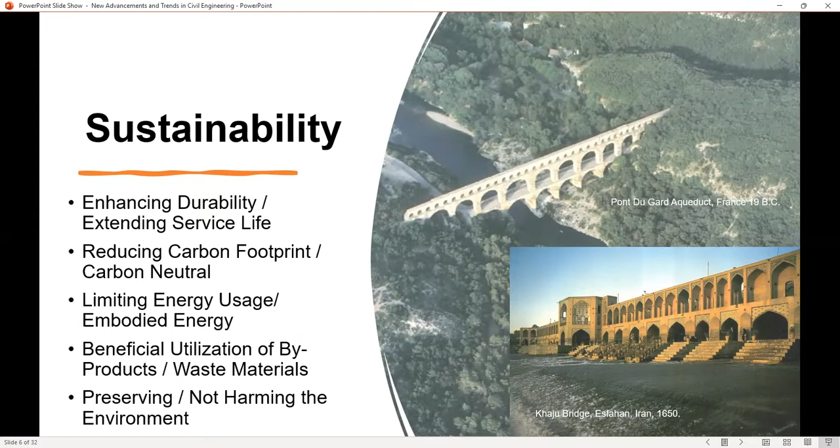We want to beneficially use byproducts, waste materials from industrial processes, in construction. So not only to use a waste material, but also to improve the properties of construction material. And finally, we want to preserve and not harm the environment.

Now, concrete is the most used construction material in the world. And of course, a major ingredient of concrete is Portland cement, and it's produced all over the world. Portland cement is a significant contributor to CO2 emissions worldwide, approximately 0.9 kilogram of CO2 for every kilogram of cement produced. That's roughly about 8 to 10% of global CO2 emissions. It has a lot of embodied energy because a lot of energy goes into producing Portland cement, the clinker, the high heat that has to be applied, and that builds significant energy into the material.

Now, what can we do about it? We have to work with concrete. It's a major construction material, but we can try to reduce its impact on the environment by using materials that mimic, that act like cement, but they are not cement. And ideally they could be waste materials that we can use in there. And those we call pozzolanic materials, and I'll explain why the word pozzolanic. Those can not only reduce the Portland cement usage in concrete, but also can improve the properties of concrete and make it more durable.

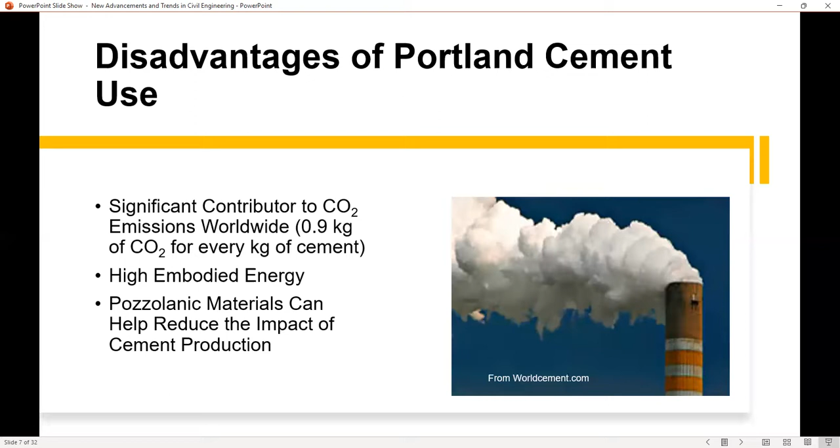Pozzolanic materials, by the way, pozzolanic comes from the old Roman word pozzolana, which was a volcanic ash. And pozzolanic material is a material, typically very fine powders, that become cementitious in the presence of lime. Okay, so it can be used to replace part of Portland cement in concrete. 10%, 15%, 20%, 25% can be reduced with that.

So what are some of the major pozzolanic materials? For example, fly ash: in coal burning power plants, in the stacks, they put devices to catch the fly ash from getting out into the atmosphere. And in the United States, for example, about 100 million tons of ash gets produced. For many years, they would be landfilled, but then research showed that they could be used in concrete and replace the cement in concrete. This pozzolan, because Portland cement has lime in it, would react with that and acts as a cement and reduces the impact of cement, but also improves durability properties of concrete.

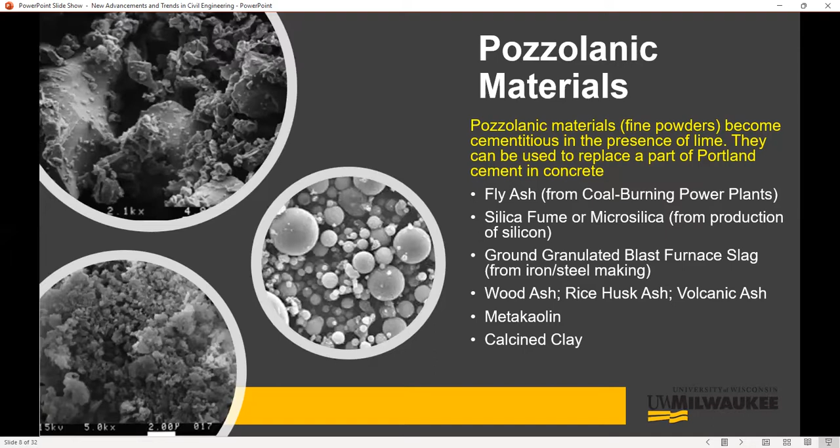Ground granulated blast furnace slag is also made from a waste from iron and steel making industries. Also around the world, wood ash, for example, rice husk ash, volcanic ash, these all can become cementitious in the presence of lime. Other materials, metakaolin, calcined clay. We are working at the University of Wisconsin, Milwaukee on developing new pozzolans based on industrial waste materials that can be beneficial to the reduction of cement use.

In terms of durability, we know structures that have withstood the test of time, centuries in service. The stone arch bridges throughout Asia and the Roman Empire are indicative of that ability to make durable structures. Now, the Roman arches were typically semicircular arches, but we'll see with the Great Stone Arch Bridge, they became more flattened over time to become more efficient. However, how can we make concrete more durable? There are ways that we can make concrete more durable, extend service life. One is to use what we call high performance concrete, which essentially reduces permeability.

A major way that concrete is harmed in the long term is when water mixed in with harmful chemicals like chlorides or sulfates, for example, get into the concrete, and if there are embedded steel reinforcing bars, causes corrosion of the steel, and when the corrosion happens, the steel wants to expand. As it expands, it pushes the concrete away, cracks it, and leads to spalling.

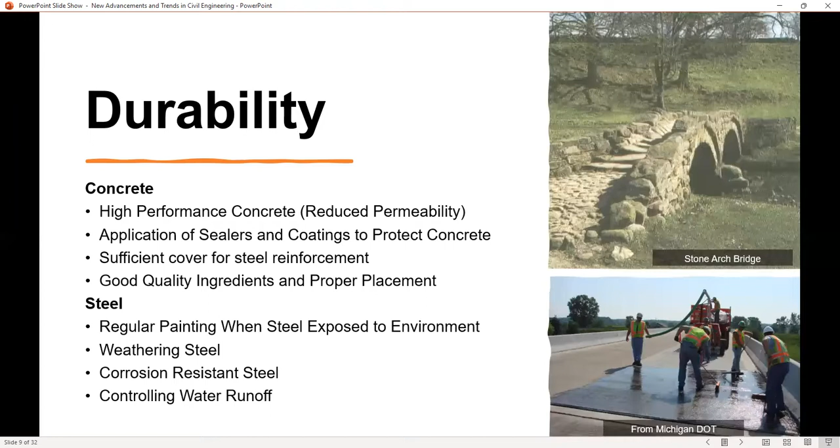Now, we look at recycled materials or waste materials in two ways in concrete. One, concrete itself can be reused when it's at the end of its service life. When we have concrete pavements, it is very common in the United States to break it into aggregates and use it as sub-base material. Okay, so you are reusing the material into another roadway. Now, there is research going on to use that in concrete as well. That's a little bit more challenging, but it has been successful in some research projects that have been done.

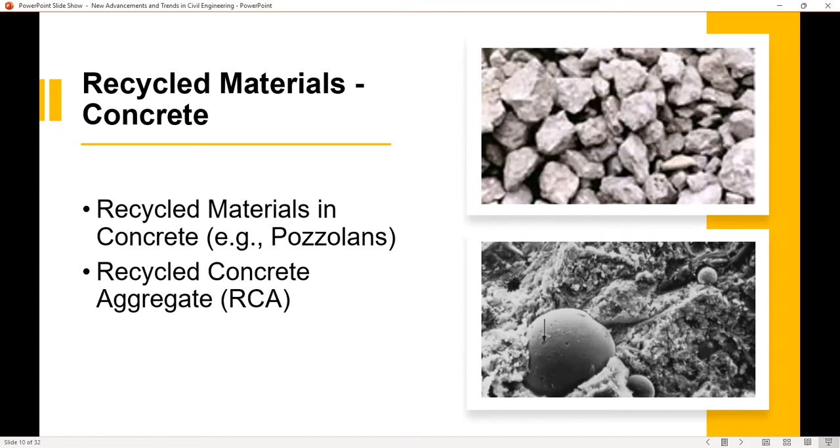Another way is to put waste materials, which are pozzolans, for example, into concrete. The bottom picture here is a scanning electron microscope image. You see the fly ash inside the concrete. That fly ash, as a pozzolan, helps a lot with the durability of concrete.

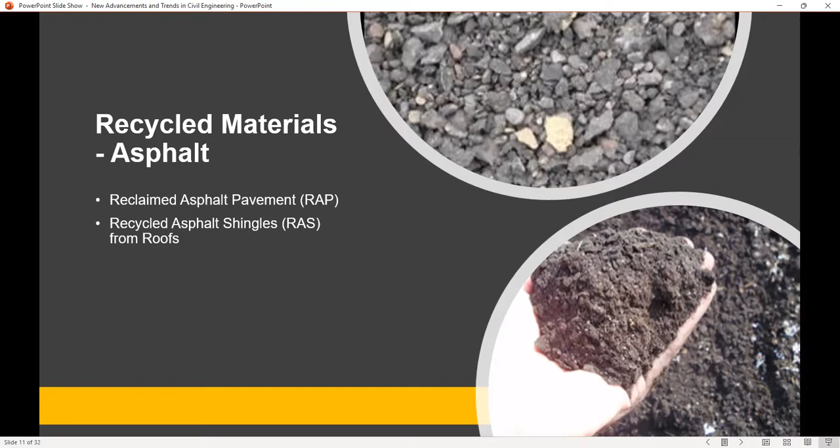Now we recycle pretty much everywhere. If there is asphalt pavement, when they want to remove it, they recycle the material. The bitumen and the aggregates, they're all recycled. In the US, a lot of houses have asphalt shingles. Those asphalt shingles are also recycled.

Now, I'm going to talk a little bit about resilience. That's another important topic in civil engineering. We define resilience as the ability to sustain and resist the forces of nature, forces of nature being earthquakes, floods, winds, and recover from them without loss of life. That's the first and foremost thing, no loss of life. So even in the most severe earthquake, we want to preserve life. Our structures should not collapse, okay?

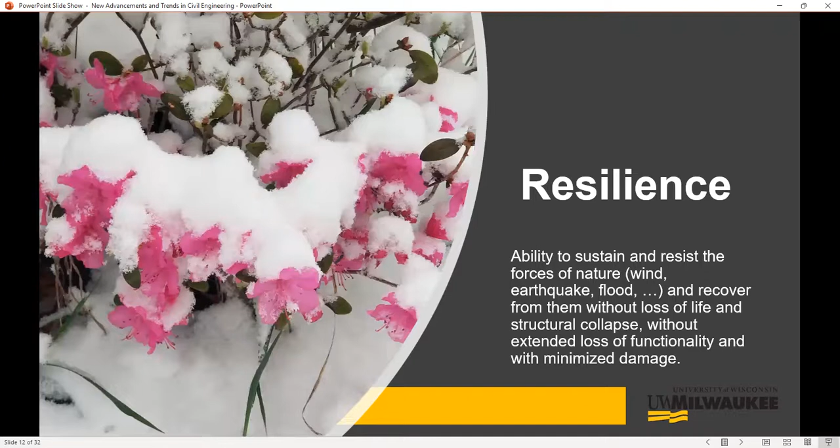However, we expect some level of damage because to make it without damage is going to be very costly. But more and more people want to be able to have usable buildings right after a major earthquake. So that makes our job more difficult, to not only preserve life, but also preserve the structure as well, okay? So resilience is, after you're hit, to stand up and continue again. That ability is very important in a structural system.

Now, a lot of times we do that by making the structure redundant. That means we don't rely on the structure to have one load path to the foundation. We want multiple load paths. So if one gets damaged and severed, the others keep the load transferred to the foundation. You don't want cases where failure of one element causes the failure of the entire structure. We can't allow that.

Okay, so more and more, let's say in Los Angeles, if a major earthquake happens, people have been saved, but more and more we want to reduce damage. We want, for example, the hospitals to be operating fully. They cannot be shut down. So we design those to a different standard. It's going to cost more, but emergency vehicles, emergency centers, hospitals, police forces have to be able to operate in the worst condition. So they have to be designed for a different level of performance after an earthquake.

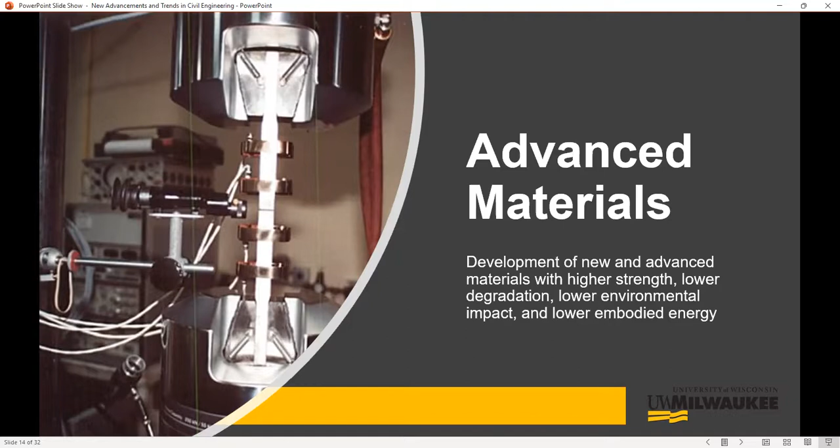So we're looking at advanced concrete materials, advanced steel materials, and fiber-reinforced polymer composites that are finding more and more uses in civil engineering. Advanced wood or timber materials, that's a new development recently, with a lot of activity. Advanced asphalt materials, self-healing materials, shape memory alloys. Shape memory alloys are materials that, if you deform them and apply temperature, return to their original shape, and that property can be used for many purposes. I'm going to touch on some of those in the next slides, not all of them.

One of the most active research areas in concrete in the United States is ultra high performance concrete. This is very high strength concrete that I'm going to talk a little bit more about later. We also have older fiber reinforced concrete that has properties that improve concrete. However, in a typical fiber reinforced concrete, the fibers cannot replace the structural concrete. They cannot replace the steel reinforcement.

We have a Professor Sobolev at our university who is a world expert on super hydrophobic concrete, using nanomaterials. As I said, durability comes in when water penetrates into concrete. By making water move away, you improve the durability of concrete, and that's super hydrophobic concrete.

There are works being done on self-healing concrete. So if a crack develops, automatically it can work to fill that crack back up. There are different ways of doing that, and research is being done on that.

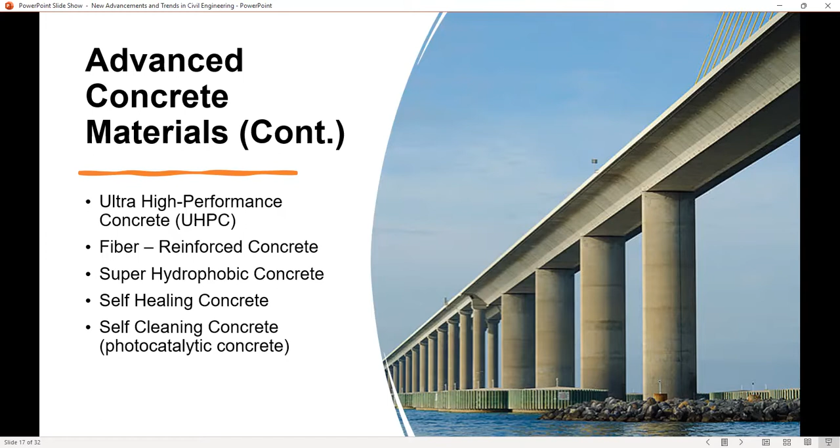Also, there is self-cleaning concrete, especially for important architectural features. You don't want the dirt to cling to the concrete surface. So by adding, for example, titanium dioxide, you can make photocatalytic concrete. It's easier for the dirt to wash out and not dirty up the surface of the concrete.

Now let's talk a little bit about ultra high performance concrete. There are different definitions for it, but the Federal Highway Administration in the US defines UHPC as concrete at least 150 MPa in compressive strength. Now, it also has to have high tensile strength, but when you get to the tensile strength, we don't want the strength to drop to zero. We want it to sustain itself.

So after cracking, it should still hold a 5 MPa tensile capacity. That will give it a more ductile behavior for concrete. Normal concrete, when it gets to a cracking load, suddenly drops to zero, and that's a very brittle nature. So this will address that. Of course, you will use steel reinforcement in UHPC as well to provide additional strength.

Now, typically with UHPC, the water to cement ratio is less than 0.25. If you have worked with concrete, you usually work with higher numbers. So this makes it very difficult to work with. That's why you have to use chemicals, specifically superplasticizers, to make it flowable so you can place it correctly.

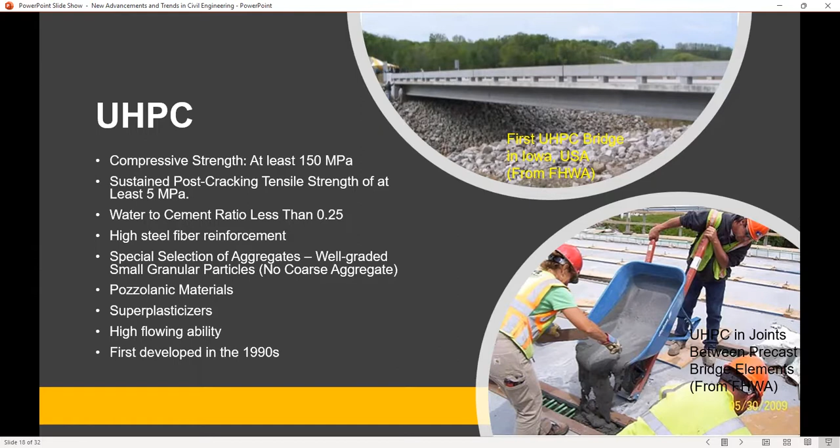In terms of reinforcing bars, up until a few years ago, the most common one in the United States was a 60 ksi or 414 MPa reinforcing bar. That's yield strength of the bar. Now they're commercially available to get 550 or almost 700 MPa bars for use in concrete. You also have stainless steel bars for corrosion resistance, but those are expensive.

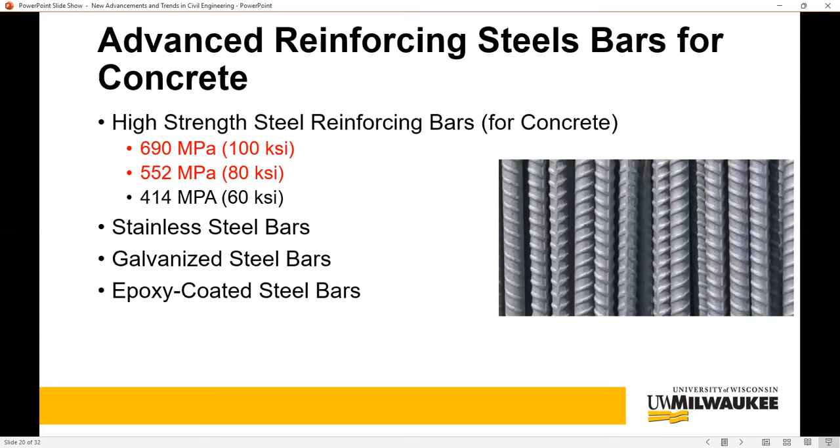There's galvanized bars, which are not as effective as stainless steel, and they have issues with the alkali environment in concrete. Epoxy coated steel bars have been used a lot. They do help. However, if the quality is not good, if there are small what we call holidays, or small holes in the epoxy, the corrosion that you could get is far worse than if you hadn't put the epoxy on it. It's a very important lesson that first applications of epoxy coated bars in the United States had major problems, and that was mitigated later.

There are also fiber reinforced polymer, or FRP, composites that are used. These are typically continuous fibers, either glass fiber, carbon fiber, aramid fiber, or basalt fiber, and there are others, mixed in with a polymer, an epoxy, and you can make bars with it. You can make sheets with it. There are two problems with that. One is a polymer is not fire resistant. So for indoor use in structures, there is a danger of fire and damage to that material unless you protect it.

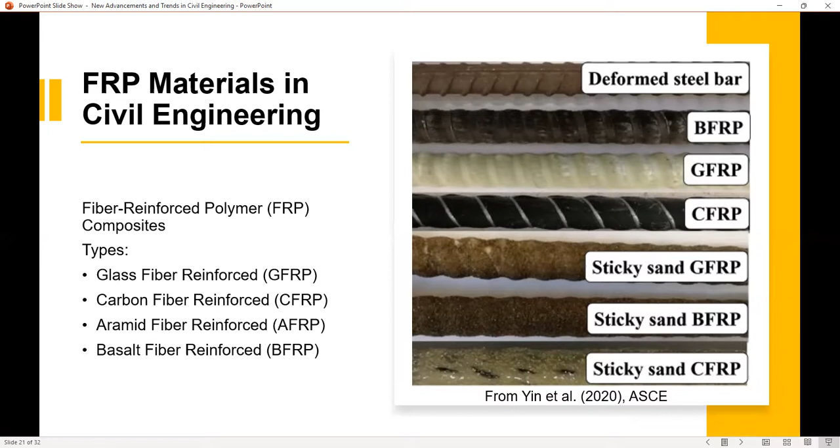But the second, more important issue is that in steel, you have a very well-defined yield, which prevents brittle fracture and premature failure. But in FRP bars, the stress-strain curve is straight all the way to failure. So when it reaches failure, there is a sudden brittle fracture of the material. However, it has its uses. For example, if you have an MRI unit in a hospital and you don't want the walls to have steel in them because you're working with the magnet, you would reinforce them with these FRP bars.

Another very good application is seismic retrofitting, improving the strength of columns, connections, or walls. You glue these things on the surface, with carbon fiber, with glass fibers, to improve the strength for earthquakes. They have many advantages, but as I said, the big disadvantages are brittleness and fire resistance. They also make them, on the top right, in sections, I-beams, channels, and so on.

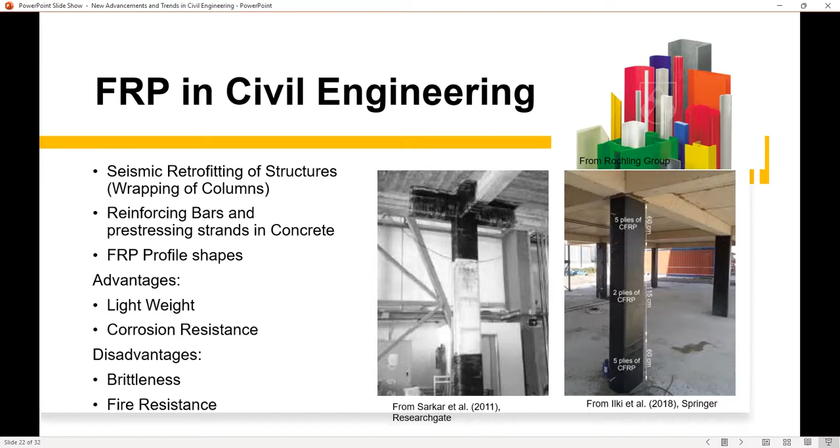Now, in terms of wood materials, there has been a lot of activity recently on wood, and what's called cross-laminated timber, CLT, is produced in factories. You take the dimensional lumber and you put them in one direction together, and then you go the other way together, and you glue them together. You have a strong and good system here that more and more research is being done on. And I read that there is an 80-meter tall tower under construction in Norway with CLT.

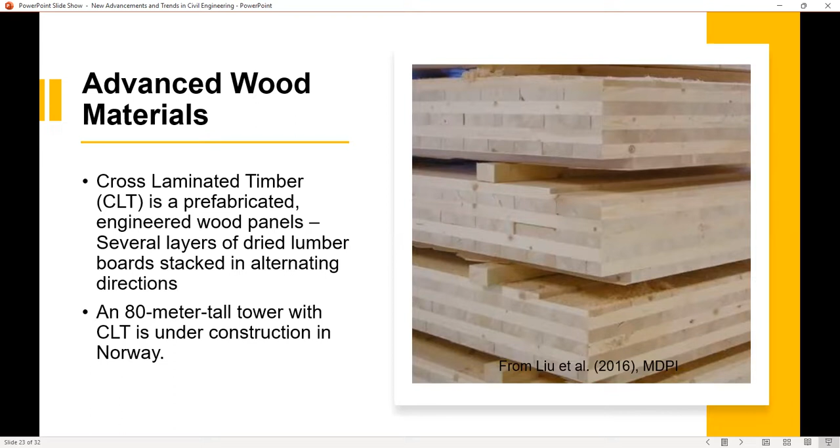There are design methods now, our software for design is very advanced, including visualization. We're working with performance-based design, as I mentioned earlier, that when a client wants to be operating after an earthquake, depending on what performance they want and how costly it will become, we can design according to that requirement. There are more advanced seismic resistance methods and devices. I'm not going to get into that matter. Also, energy and carbon consideration.

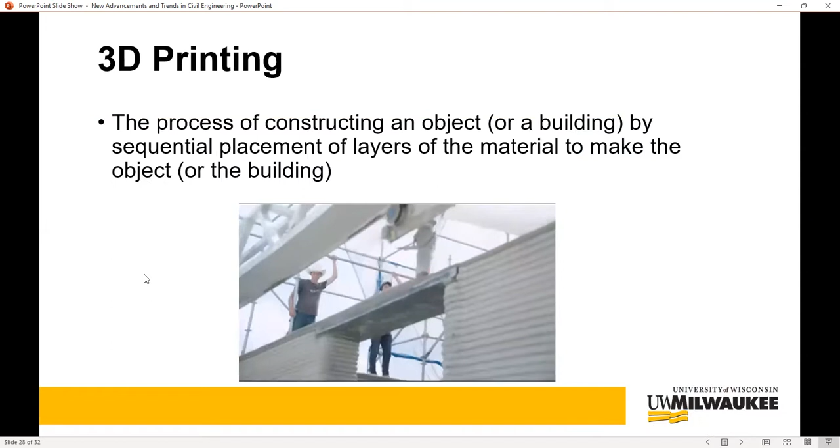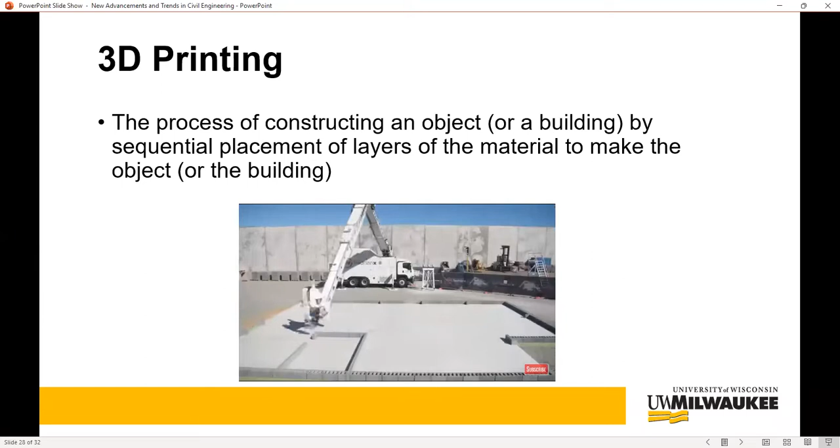So in terms of 3D printing, it's a process where you are putting layers of concrete as you do 3D printing. There are a lot of issues with that still, but there's a lot of research being done on that. Then you can create any shape that you want with this process, with this robot.

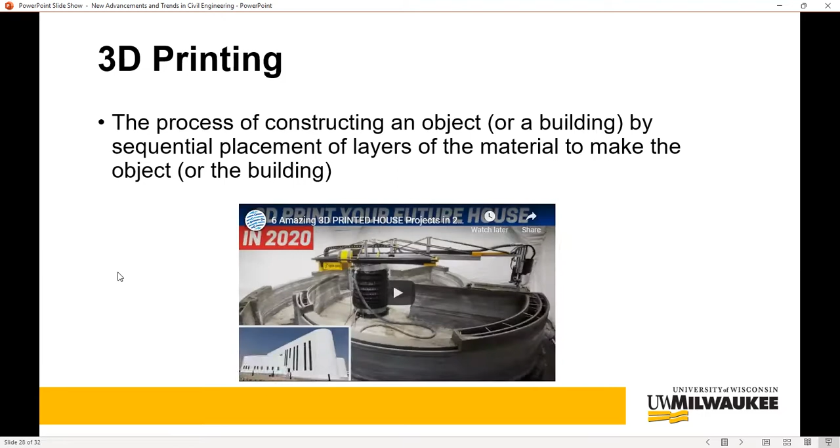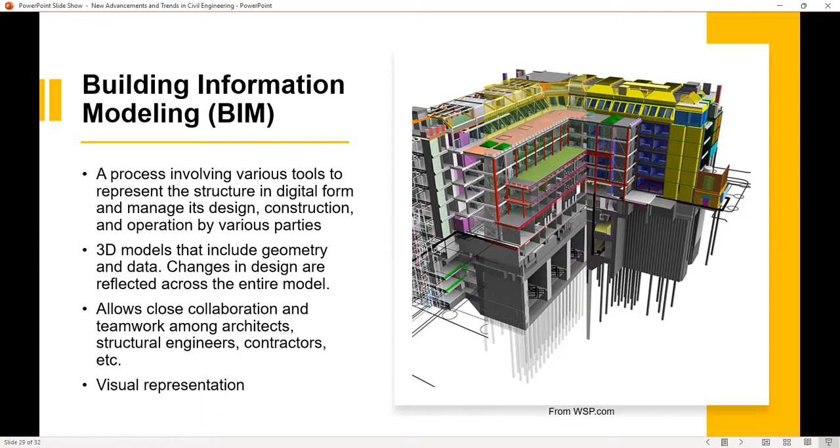If an architect changes part of the design, the structural engineers' drawings would change accordingly, or the models would change accordingly. So it has not only geometry, it has data, and you can zoom in and see if there are conflicts and so on. So this has been very active, and it's widely used now in construction in the United States.

As I mentioned, accelerated bridge construction, where the motivation is to improve quality and reduce impact on people. You don't have to close roads for a long time. And so you build the pieces and you bring them, and there are connections. The issue would be the connections, and a lot of times we use UHPC in those connections.

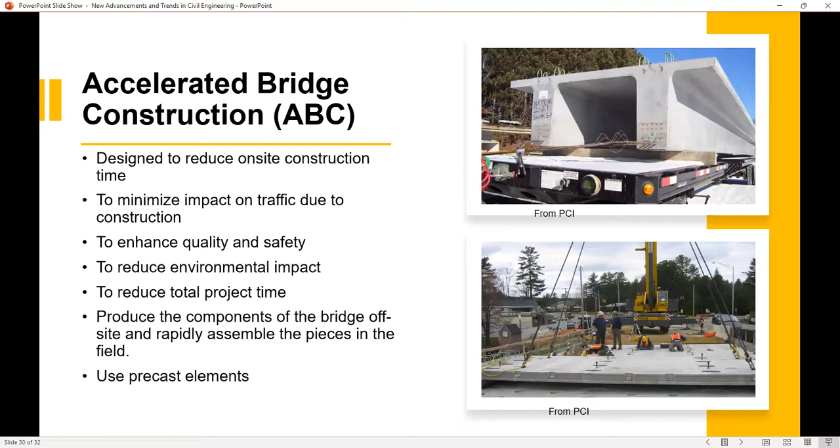So in concluding this, there is a great need for sustainable and resilient structures today to face the challenges that we face in the world today. We want to have new technologies developed, new materials to face that challenge. Modern civil engineering structures and systems and infrastructure have to be efficient and durable, with low embodied energy and minimum impact on the environment.

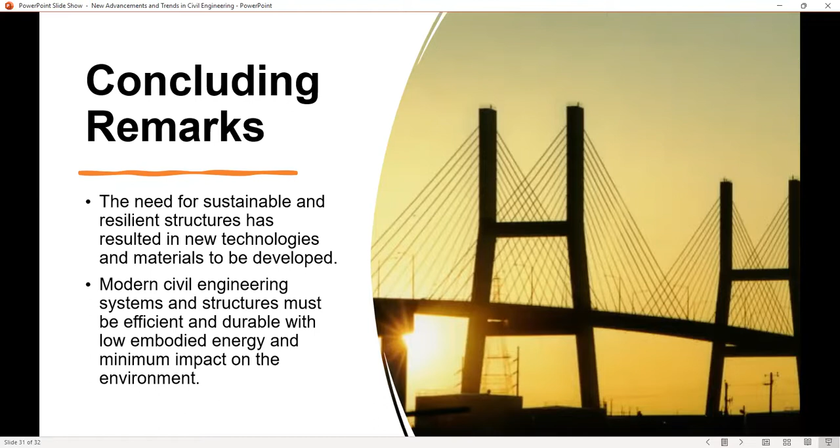Now I finish with this picture of the Hoan Bridge in Milwaukee. Professor Ishnazov and Professor Abdunazarov are familiar with this structure. This is very close to where they are right now. This is a magnificent bridge that almost collapsed about 20 years ago due to brittle fracture of steel, but fortunately it did not.